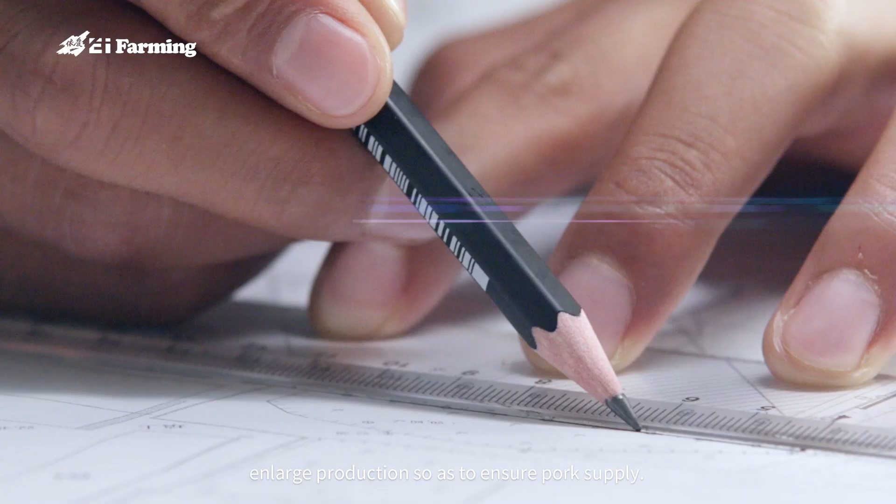EI Farming has explored animal husbandry for decades. We are committed to providing pig farms with advanced concepts, project design, support equipment, and engineering services.

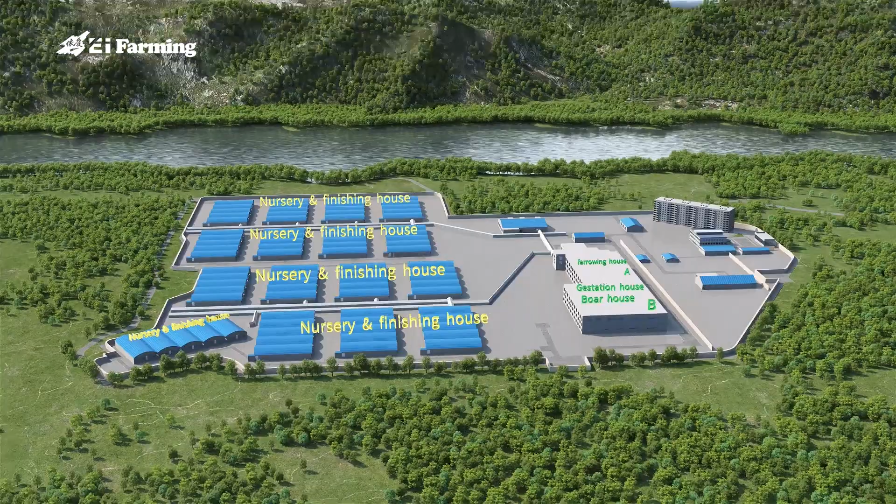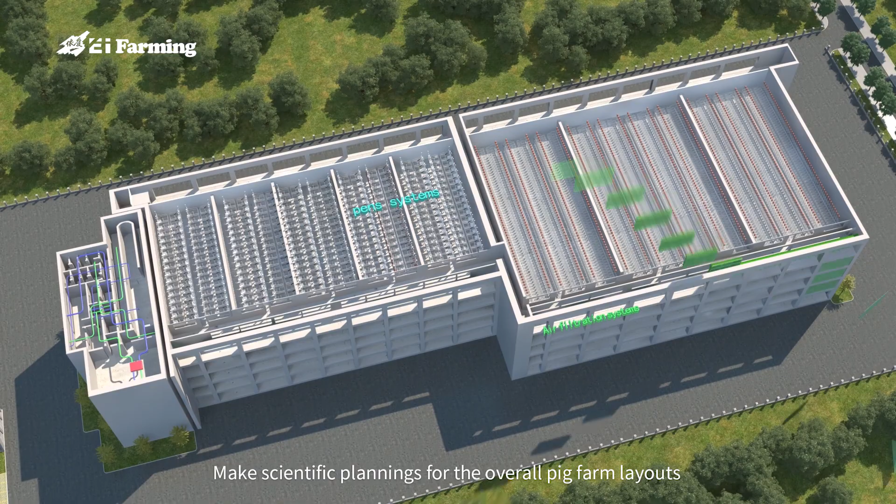Our engineers start work from clients' project drawings, make scientific plannings for the overall pig farm layouts, equip various types of pens, air filtration and deodorization systems, feed supply and feeding systems, environmental control systems, and other equipment for pig farms, providing professional engineering, construction, and technical services for pig breeding companies.

Good project supporting service and construction quality help our company upgrade abilities to serve large-scale pig breeding companies.

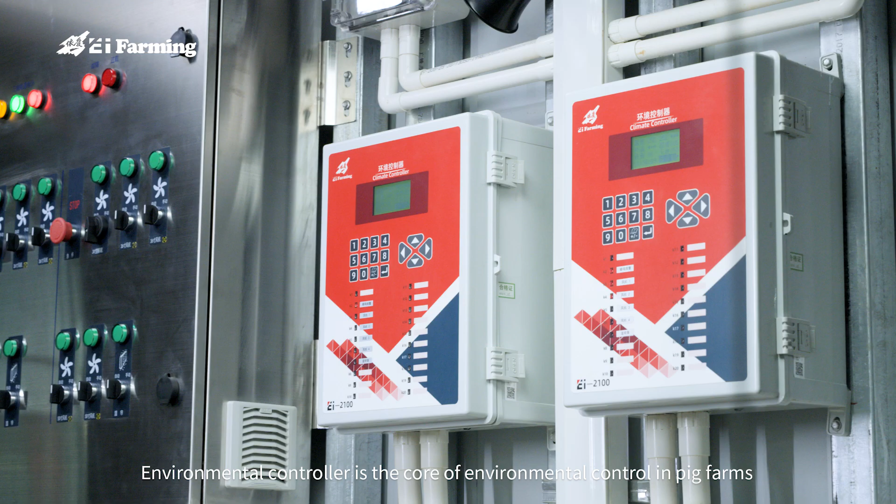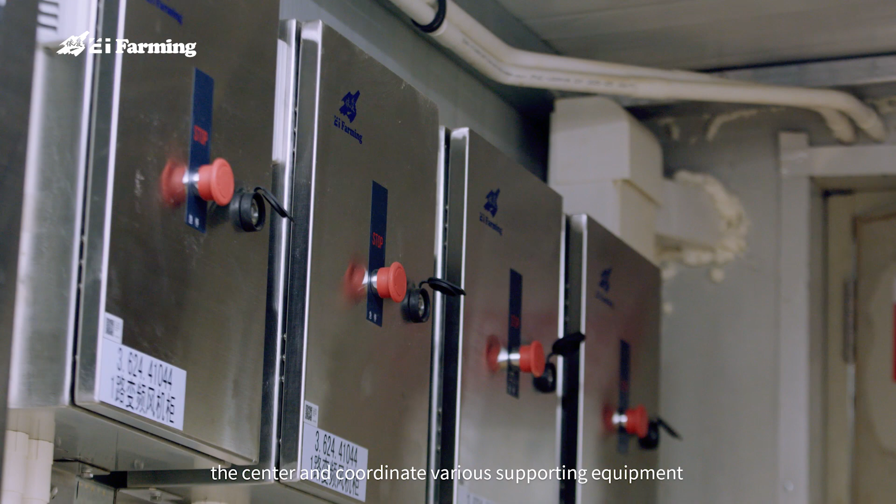Environmental controller is the core of environmental control in pig farms. Our independently developed EI2100 and EI6100 environmental controllers take the environment controllers as the center and coordinate various supporting equipment, offering pig production an environment with suitable temperature, humidity, light, and air to meet the requirement of pig growth.

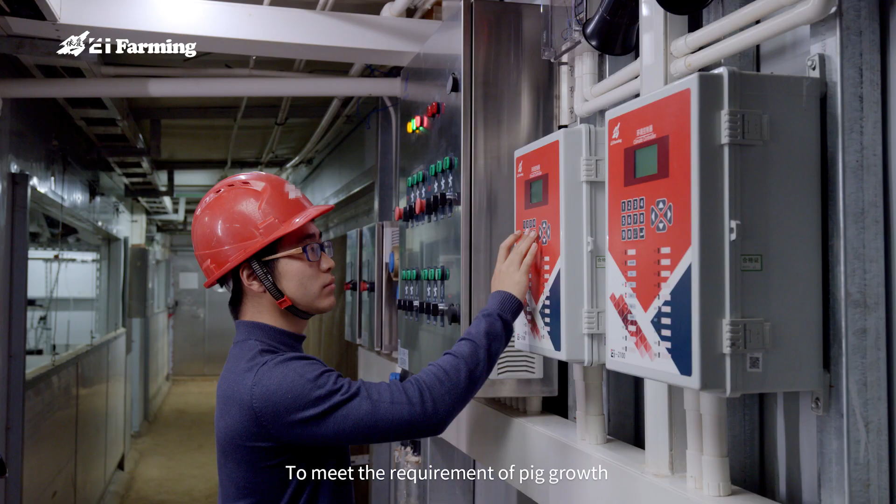Based on the feeding parameters recorded on the controllers and the monitoring data of pig growth status, etc., breeders can make analysis and corresponding decisions to improve the management and feeding quality of pigs.

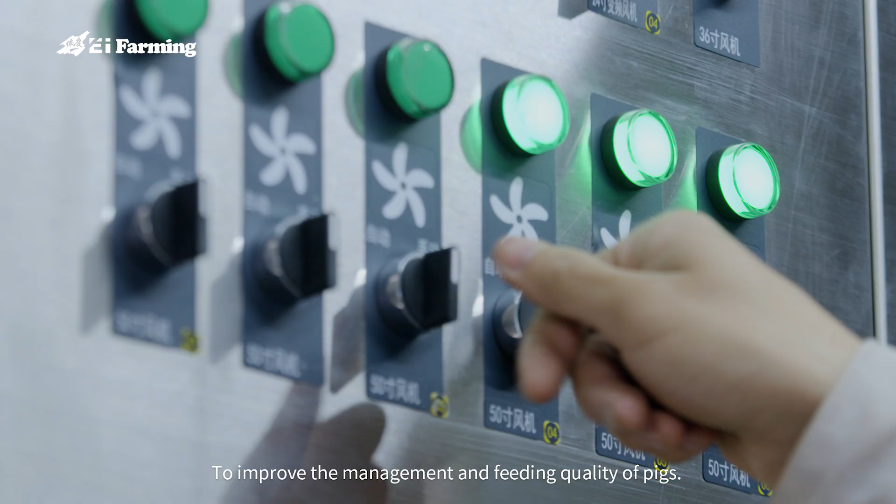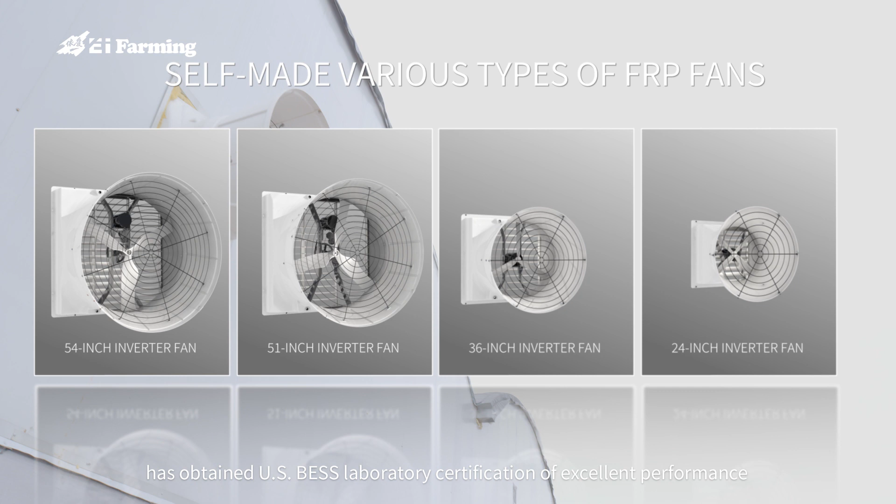We accurately calculate ventilation rate in pig farms to offer a reasonable combination of various types of fans. The fiberglass reinforced plastics fan developed by our company independently has obtained U.S. BESS Laboratory certification of excellent performance.

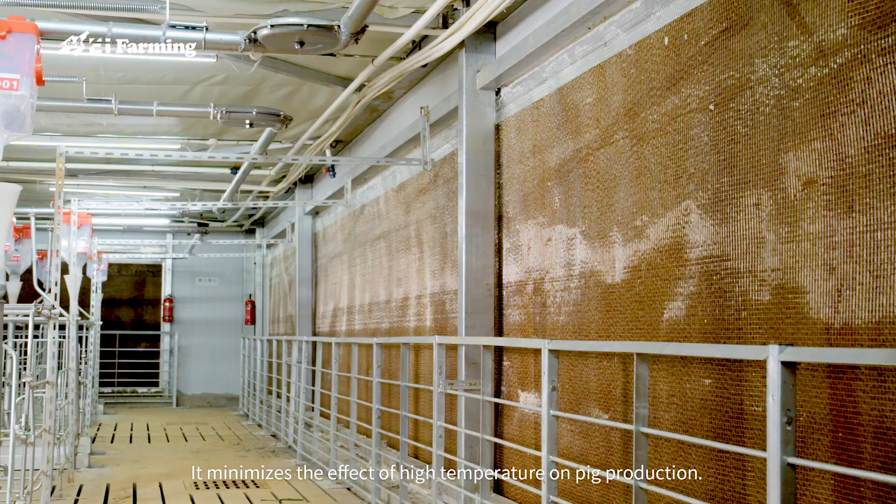Combination of fans and cooling pads is an economically effective cooling measure for pig farms in summer. It minimizes the effect of high temperature on pig production.

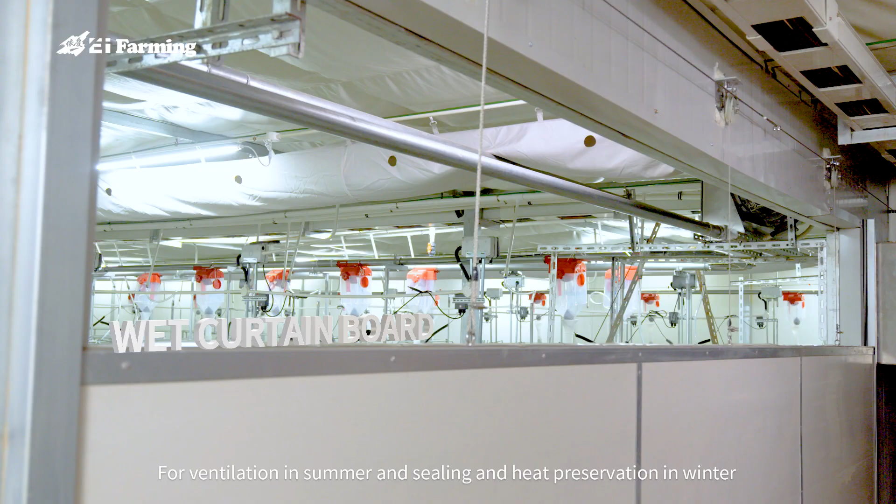Roller curtains are fixed on the exterior of cooling pads for ventilation in summer and sealing and heat preservation in winter. Sliding plate air intakes are fixed on the internal walls of the corridor to achieve a double effect of ventilation in summer and heat preservation in winter.

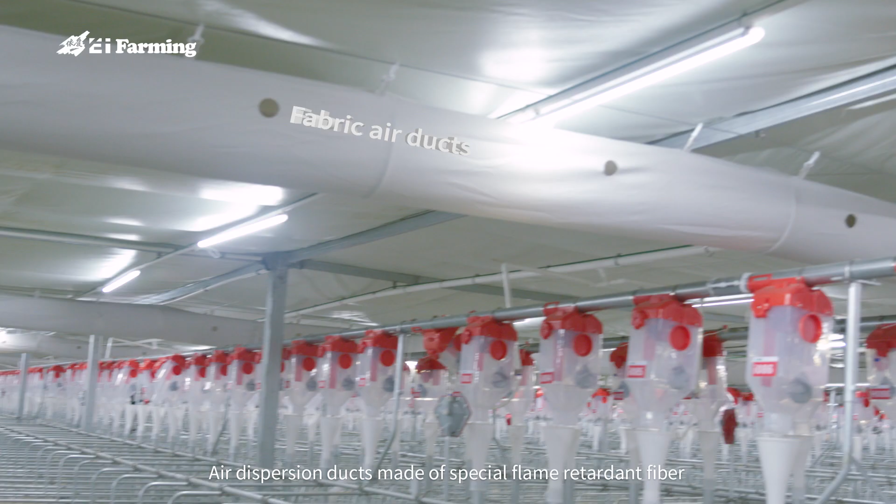Air dispersion ducts made of special flame retardant fiber jet the air through nozzles. Uniform air supply is suitable for ventilation of pig farms in winter.

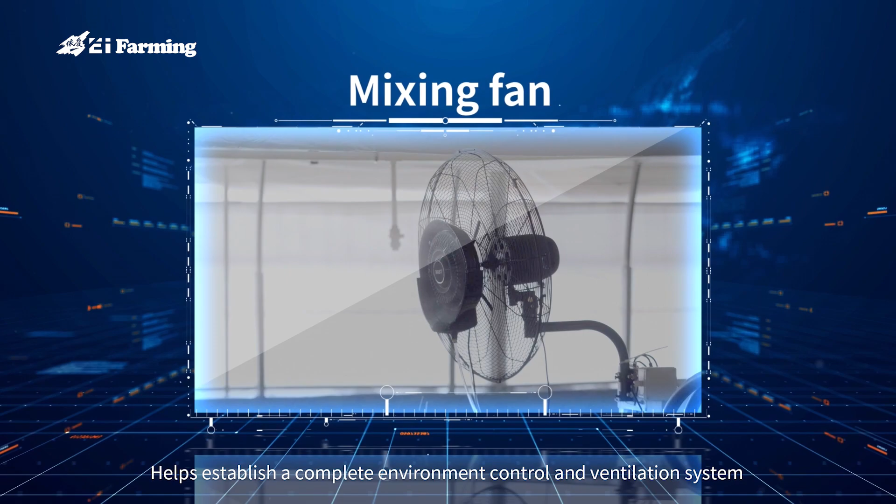EI Farming continuously optimizes the environmental control system for pig farms. The design method of simulation helps establish a complete environment control and ventilation system.

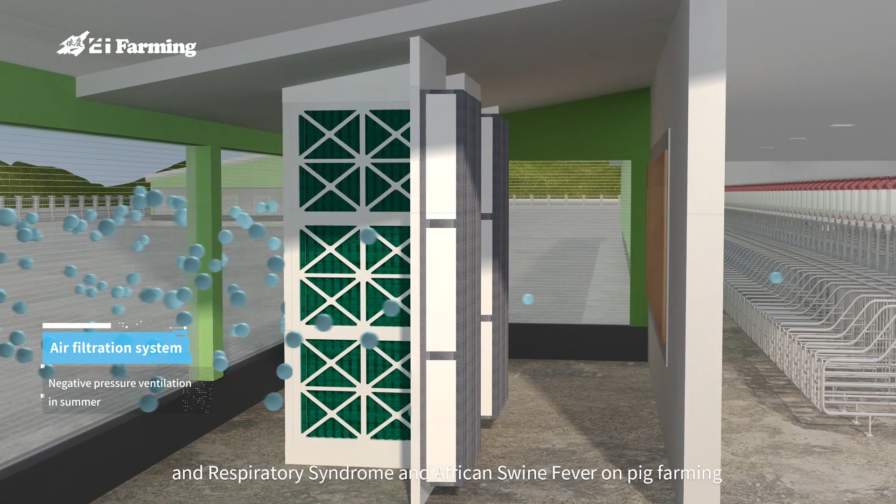For the continuous impact of viruses such as porcine reproductive and respiratory syndrome and African swine fever on pig farming, it is particularly important to conduct a comprehensive and effective biosecurity system in pig farms.

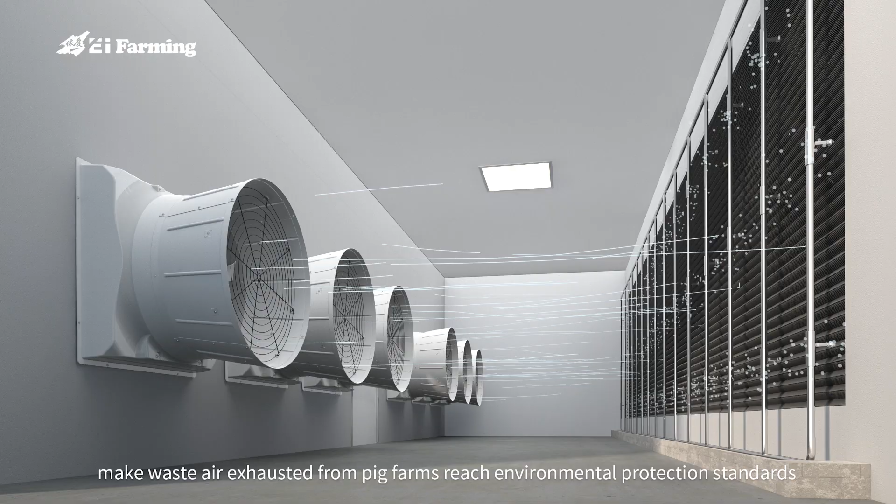The combination of air filtration system and the deodorization system make waste air exhausted from pig farms reach environmental protection standards. The air filtration system can effectively prevent airborne viruses from entering pig farms to improve the air cleanliness in pig farms. The initial filtration walls in sow houses have good effect of air filtration and epidemic prevention.

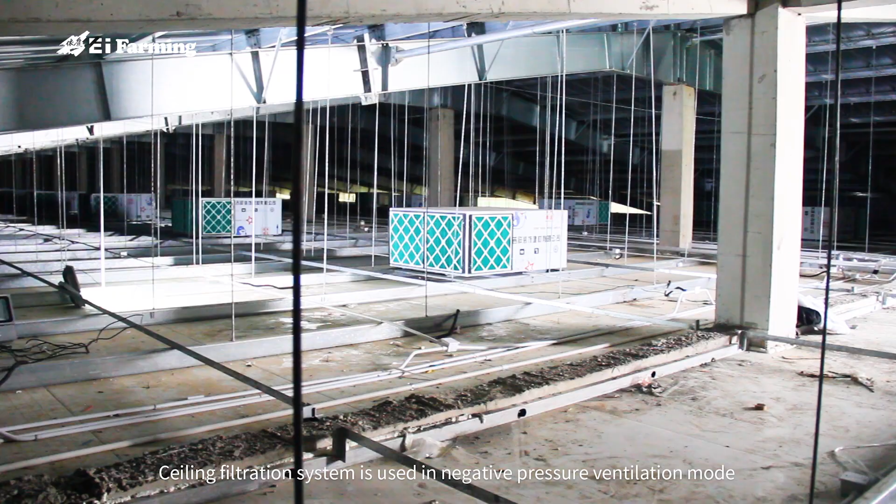Ceiling filtration system is used in negative pressure ventilation mode for ventilation and filtration of pig farms under lower temperature. The wind protection netting can prevent the entry of wind, sand, and mosquitoes, etc., from entering pig farms through cracks in fan covers.

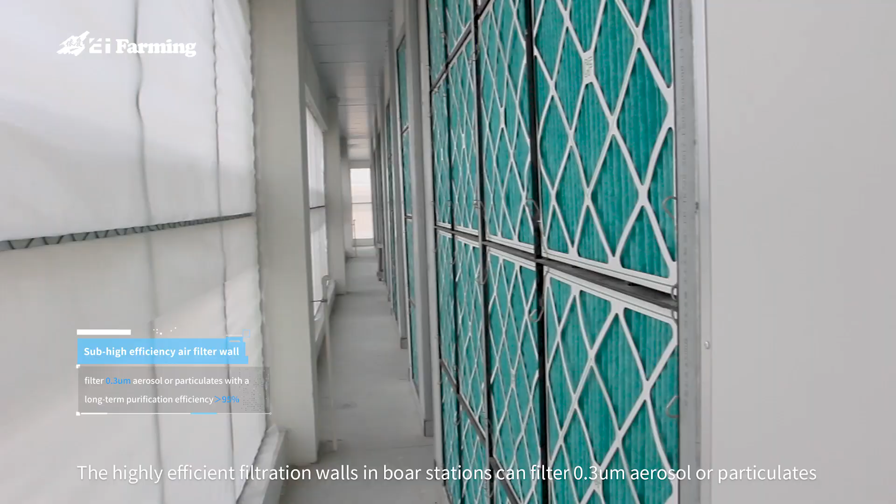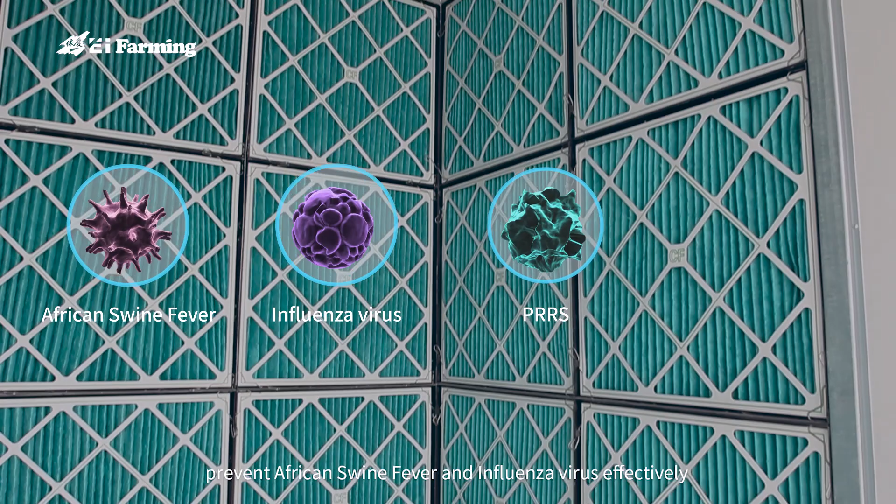The highly efficient filtration walls in boar stations can filter 0.3 micron aerosol or particulates with a long-term purification efficiency of more than 95%, preventing African swine fever and influenza viruses effectively, as well as PRRS, PCV2SD, and other pathogens.

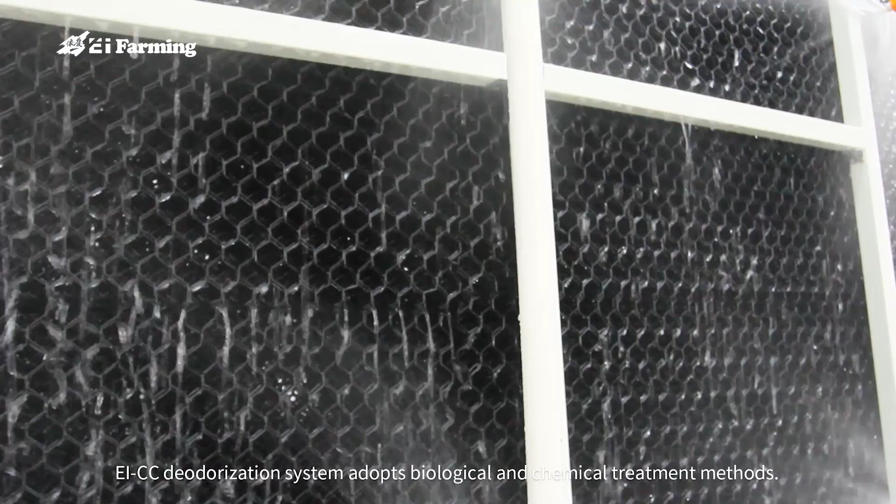EI-CC deodorization system adopts biological and chemical treatment methods. The spiral spray method is used to deodorize odor at the end of pig farms to make the exhausted air meet the air emission standards of the breeding industry and to ensure harmonious development of pig farms and surrounding environment.

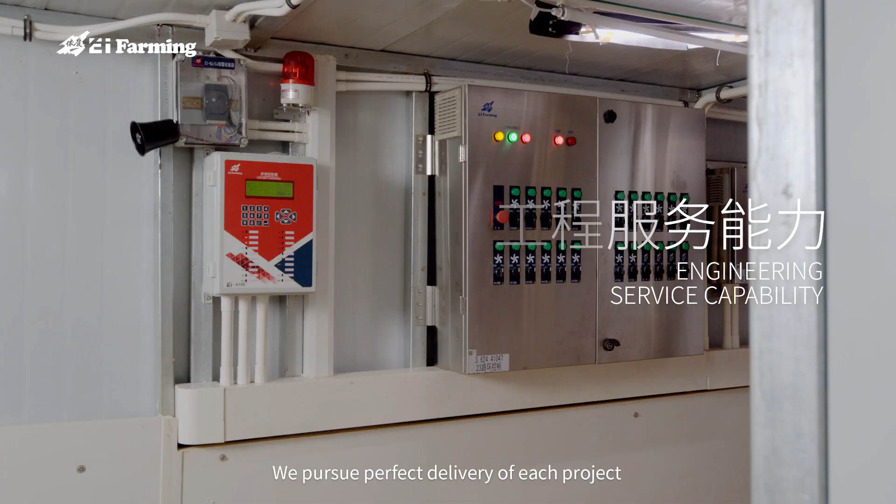We pursue perfect delivery of each project with our professional and considerate services. The engineering, construction, and technical services are the advantages our company is proud of.

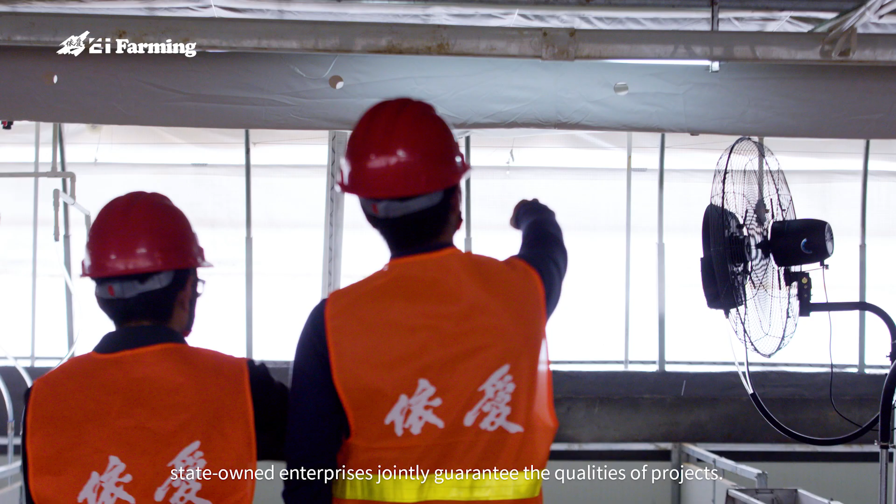The enterprise spirit and responsibility of state-owned enterprises jointly guarantee the qualities of projects. Our project team takes the project delivery dates as deadlines, aiming to pass inspections at the very first time.

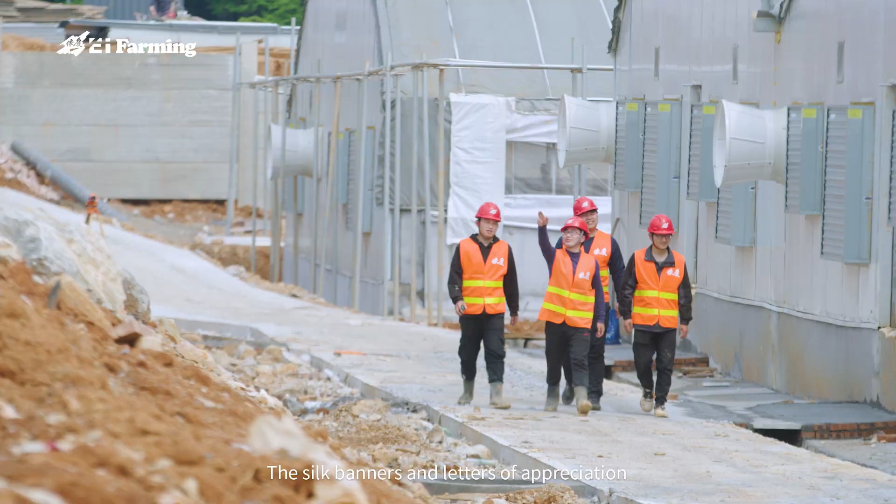Our company has won trust and praise of multiple leading pig breeding companies. The silk banners and letters of appreciation reflect the recognition of our engineering services.

At present, EI Farming takes integrated solutions for intelligent breeding projects as the leading focus, concentrating on the digitalization, intellectualization, and intelligent transformation of the breeding industry chain, and commits to providing EI Farming solutions for the sustainable development of the pig breeding industry all over the world.